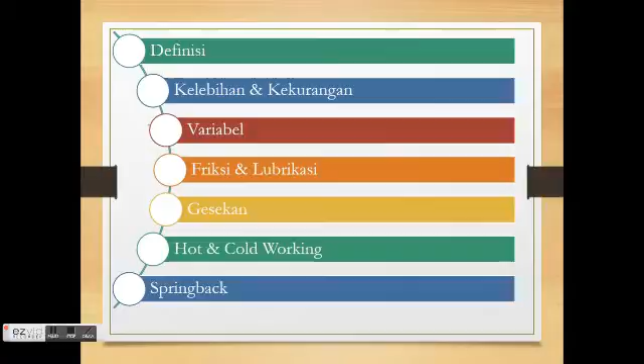Proses pembentukan (forming) adalah proses mengubah bentuk logam dengan suatu gaya pada arah tertentu tanpa menyisakan serpihan.

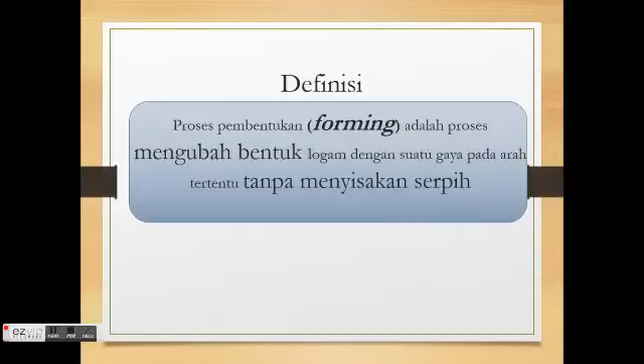Kelebihan dari metal forming, karena padatan, maka tidak perlu perangkat pembawa cairan. Tidak ada kompleksitas pemadatan. Dibanding dengan proses pemesinan, proses pembentukan menghasilkan scrap yang lebih sedikit.

Kekurangan dari metal forming ialah gaya yang diperlukan tinggi, mesin dan perkakas mahal. Sebagai konsekuensi dari kedua hal tersebut, maka harus dalam produksi besar.

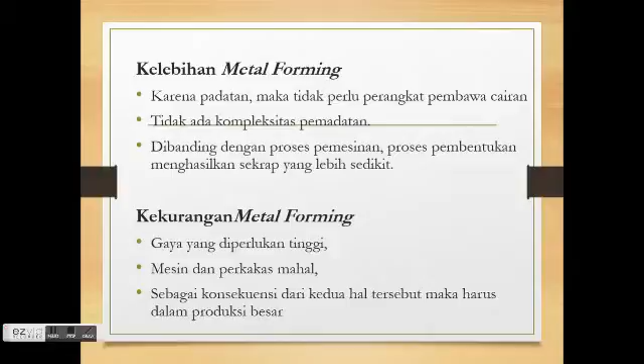Variabel proses pembentukan. Variabel bebas, yaitu variabel yang ditentukan ketika proses setup, di mana variabel tersebut dapat dikontrol langsung. Variabel tak bebas adalah konsekuensi dari pilihan variabel bebas.

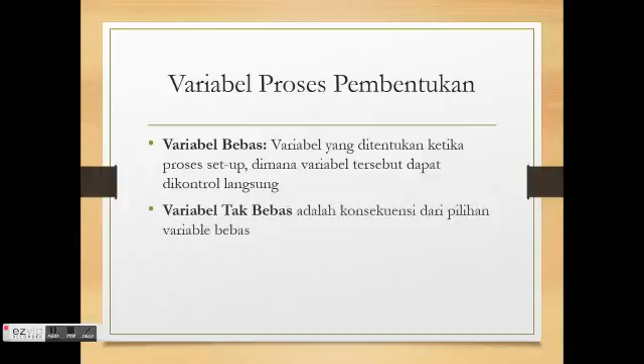Variabel bebas meliputi material permukaan, sifat kimia, dan persyaratan sifat serta karakteristik bahan.

Dasar pemilihan: kemudahan fabrikasi dibatasi oleh sifat produk yang diinginkan. Geometri benda kerja dipilih dari varietas bentuk yang ada atas pertimbangan ekonomi.

Geometri perkakas atau cetakan sangat berpengaruh karena sistem perkakas akan memproduksi dan mengontrol aliran logam.

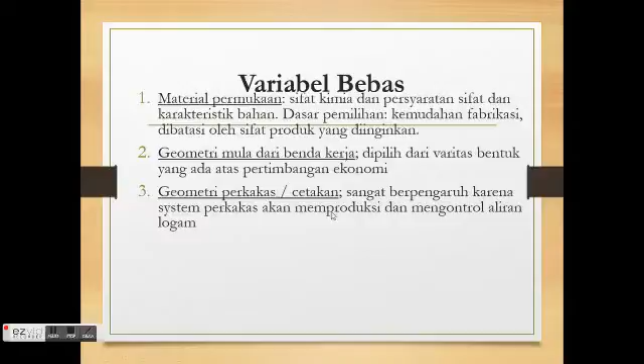Yang keempat, pelumasan. 50% daya yang diberikan digunakan untuk mengatasi gesekan. Fungsi dari pelumas yaitu melumasi, pendingin, pembatas panas, pencegah korosi, dan senyawa pemusnah. Yang perlu diperhatikan ialah tipe pelumas, jumlah yang harus diberikan, dan metode pemberian.

Kelima, suhu permukaan baik untuk benda kerja dan perkakas. Keenam, kecepatan operasi mempengaruhi efektivitas pelumas, gaya yang diperlukan untuk operasi, dan waktu tersedia untuk pindah panas. Dan yang ketujuh ialah jumlah deformasi.

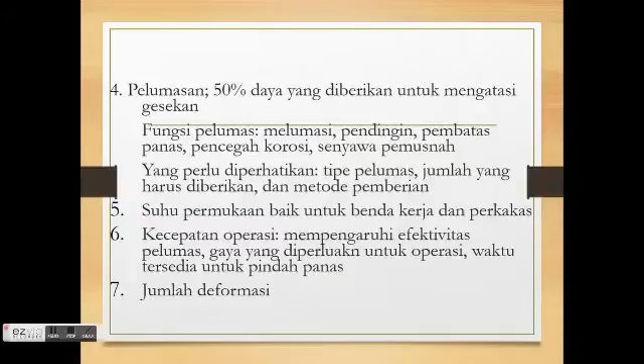Variabel tak bebas. Pertama, gaya atau daya yang diperlukan. Kedua, sifat material produk. Perhatian konsumen pada bentuk dan sifat material akhir sehingga perencana harus pandai memilih material awal dan memprediksi pengaruh proses dalam mengubah sifat tersebut.

Ketiga, exit atau final temperatur. Keempat, surface finish, yaitu permukaan akhir dan kehalusan. Dan yang kelima, sifat aliran bahan.

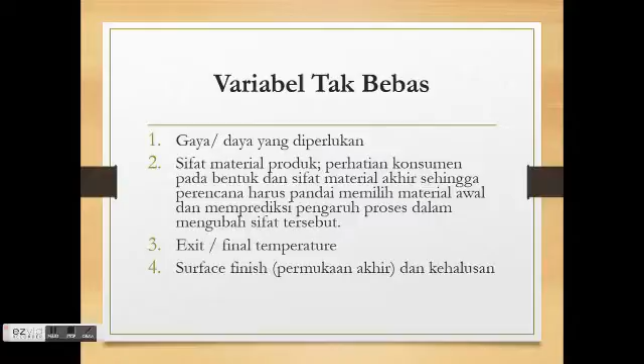Friksi dan lubrikasi. Beberapa proses, 50% energi input digunakan untuk mengatasi gesekan. Surface finish dan kepresisian produk dipengaruhi oleh friksi.

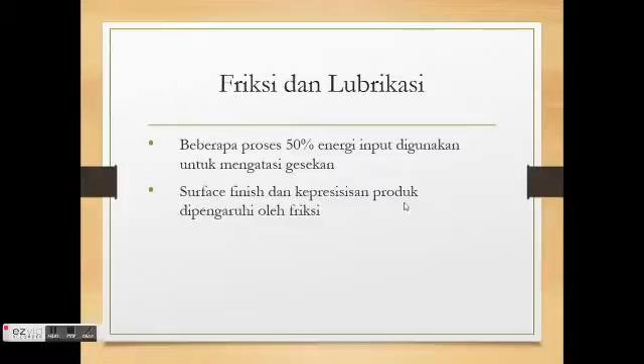Pada gear, bearing, journal, dan komponen sejenis, kondisi friksi melibatkan: pertama, dua permukaan dengan material dan kekuatan serupa; kedua, di bawah beban elastik di mana salah satu komponen mengalami perubahan bentuk permanen; ketiga, keausan berbentuk lingkaran yang menghasilkan kesesuaian permukaan, umumnya pada suhu rendah sampai sedang.

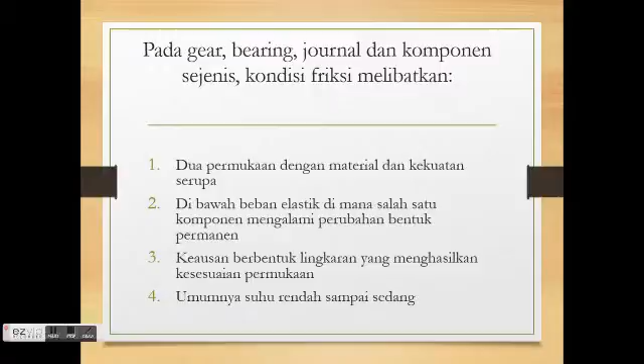Pada proses pembentukan, tool bersifat keras dan tak mampu bentuk. Hanya sekali atau satu tahap deformasi, benda kerja pada suhu yang naik atau tinggi.

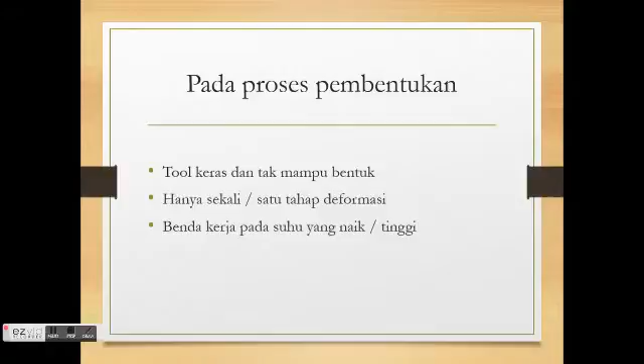Gesekan. Menurut teori friksi modern, permukaan yang rata tidaklah rata, namun ada kekasaran. Bila dua permukaan berinteraksi, kontak permukaan dibangkitkan untuk mengatasi beban yang diberikan.

Pertama, bila beban ringan, hanya 3 titik yang kontak. Bila beban naik, luasan kontak naik. Bila beban tinggi, seluruh permukaan kontak. Bila beban dinaikkan lagi, maka luasan permukaan kontak tak akan naik lagi dan friksi tetap.

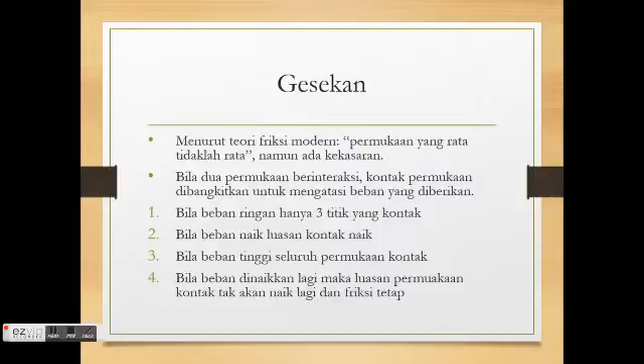Selanjutnya, pengaruh tekanan kontak terhadap gesekan. Semakin tinggi tekanan kontak, maka friksi akan meningkat. Namun, jika tekanan kontak terus dinaikkan, friksi akan tetap.

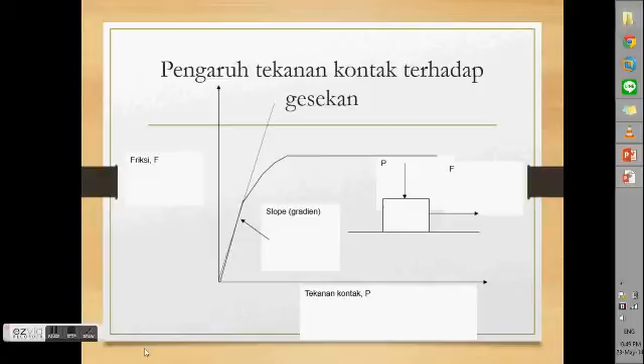Berdasarkan suhu, proses forming diklasifikasikan menjadi hot working, cold working, dan warm working.

Hot working. Deformasi dilakukan di bawah kondisi temperatur dan laju strain regangan tertentu, di mana rekristalisasi terjadi simultan dengan deformasi. Untuk mencapai ini, suhu deformasi biasanya di atas 0,6 kali titik cair material pada skala suhu absolut.

Cold working adalah deformasi di bawah kondisi proses recovery tidak aktif, biasanya suhu kerja kurang dari 0,3 kali suhu leleh benda kerja. Yang ketiga, warm working adalah deformasi di bawah kondisi transisi, yakni suhu kerja antara 0,3 dan 0,6 kali suhu leleh.

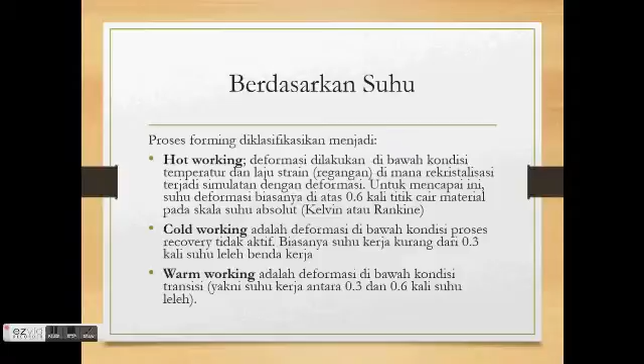Hot working didefinisikan sebagai deformasi plastis logam di atas suhu rekristalisasinya. Yang perlu diingat, beda material beda suhu rekristalisasinya. Kenaikan suhu berpengaruh terhadap penurunan tegangan logam dan meningkatkan keuletannya.

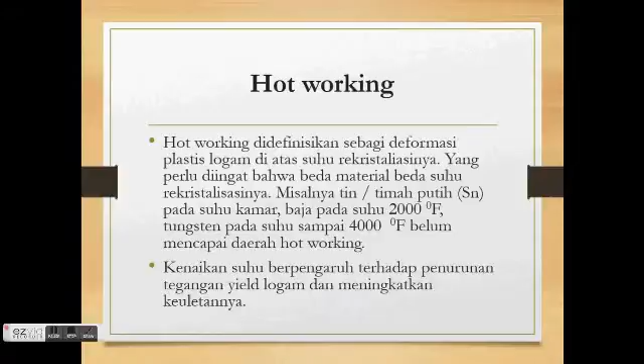Berikut merupakan video dari hot working.

Here, the steel material is processed plastically at very high temperatures. Rotating rolls reduce the thickness of the material and produce long strips that can be used for manufacturing products such as steel plates.

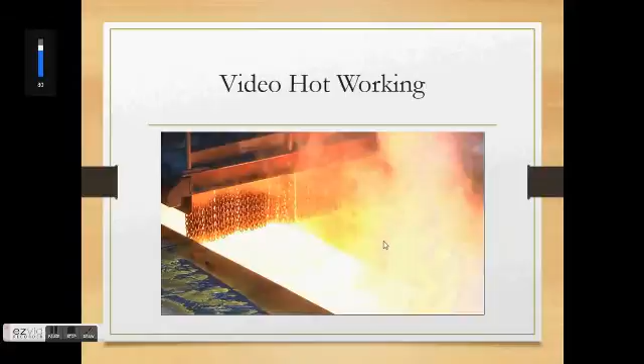We will be going through the various stages of the hot rolling process. Each stage requires knowledge and experience to ensure a high-quality product.

The material is heated in the reheating furnace, rolled in the roughing mill, coil boxed, rolled in a finishing mill, cooled and coiled.

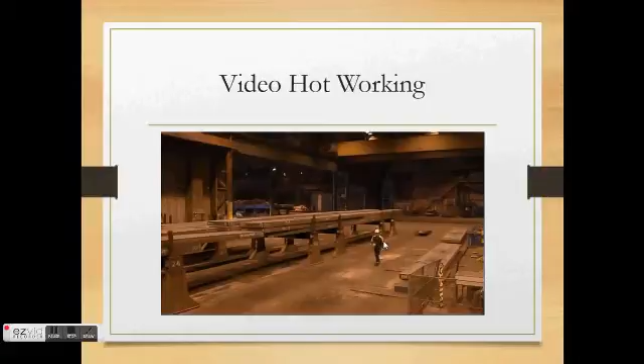Before the slab can be processed, it must be heated. The slab is continuously cast and has the dimensions required for the final product of a correct weight, width, and thickness.

These furnaces heat the material to about 1200 degrees centigrade. Two walking beam furnaces feed the material through the oven.

The heating is especially important as it affects the properties of the material. If the material is not sufficiently heated, incorrect material properties will arise. This is due to carbides and nitrides failing to dissolve.

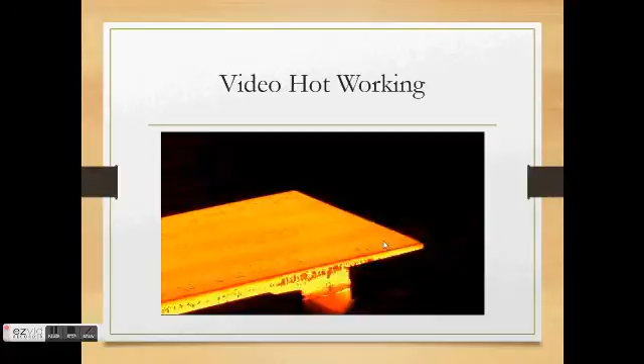During the heating process and the transport to the roughing mill, the hot material reacts to the oxygen in the air, and a mill scale consisting of oxide is formed on the surface. If the oxide layer remains on the material during rolling, the layer risks being rolled into the steel material, adversely affecting the surface quality of the final product.

The material must undergo a mill scale cleansing before rolling. In order to cleanse the surface, water is sprayed at high pressure, 160 bar.

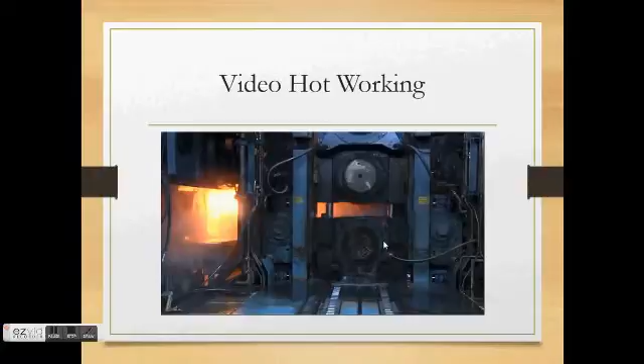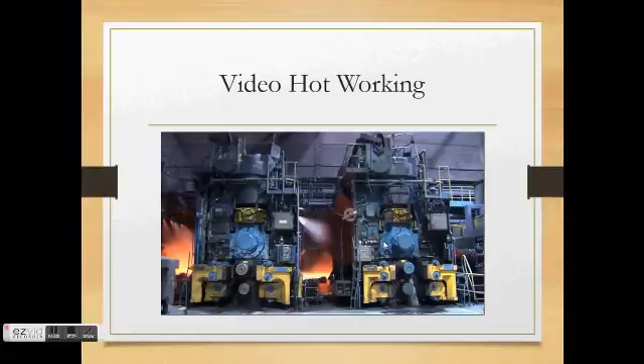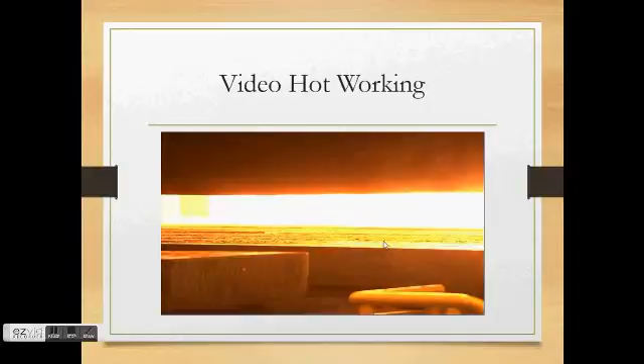We will be going through the various stages of the hot rolling process. Each stage requires knowledge and experience to ensure a high-quality product.

The material is heated in the reheating furnace, rolled in the roughing mill, coil boxed, rolled in a finishing mill, cooled and coiled.

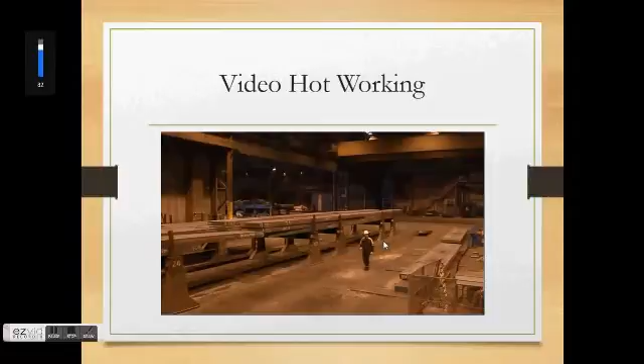Before the slab can be processed, it must be heated. The slab is continuously cast and has the dimensions required for the final product of correct weight, width, and thickness.

These furnaces heat the material to about 1200 degrees centigrade. Two walking beam furnaces feed the material through the oven.

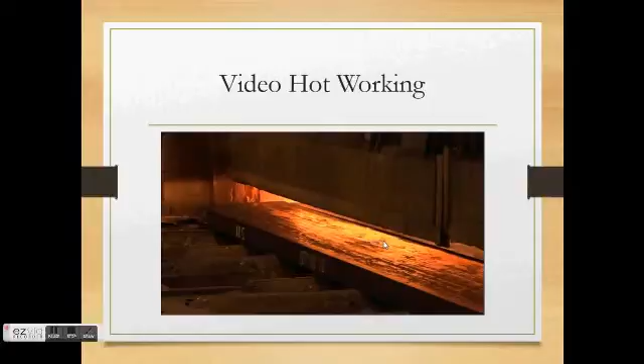The heating is especially important as it affects the properties of the material. If the material is not sufficiently heated, incorrect material properties will arise. This is due to carbides and nitrides failing to dissolve.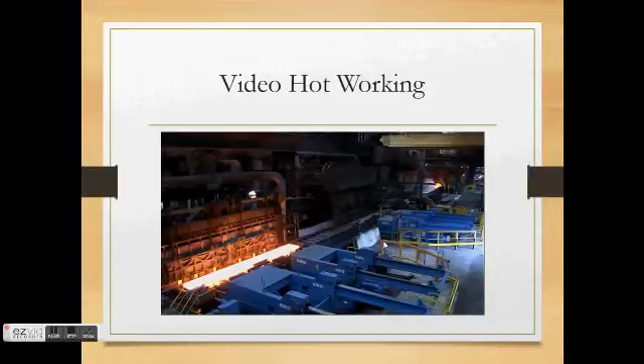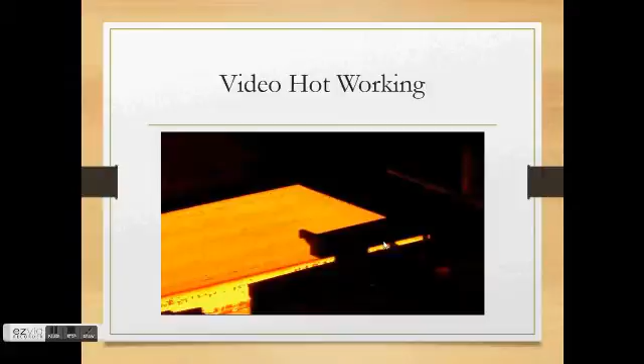During the heating process and the transport to the roughing mill, the hot material reacts to the oxygen in the air, and a mill scale consisting of oxide is formed on the surface. If the oxide layer remains on the material during rolling, the layer risks being rolled into the steel material, adversely affecting the surface quality of the final product.

The material must undergo a mill scale cleansing before rolling. In order to cleanse the surface, water is sprayed at high pressure, 160 bar.

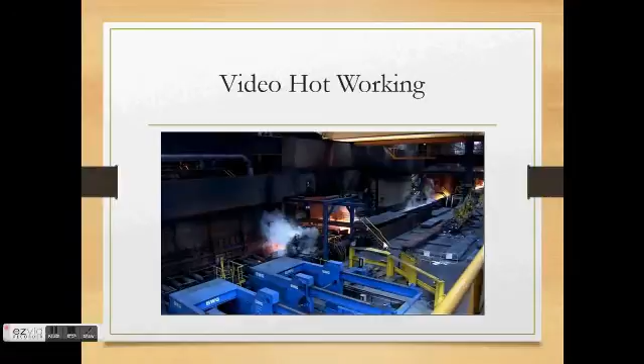After the material has undergone a surface cleansing, it's sent to the roughing mill. Here, the material is rolled from its original thickness of 22 centimeters down to about 3 centimeters. This is a very significant reduction.

At this roughing mill, a powerful 4-high rolling mill is used. That is, 2 backup rolls and 2 smaller working rolls. The backup rolls are often cast steel rolls. The working rolls must have very smooth surfaces and tolerate high temperatures and wear, as they are in direct contact with the material.

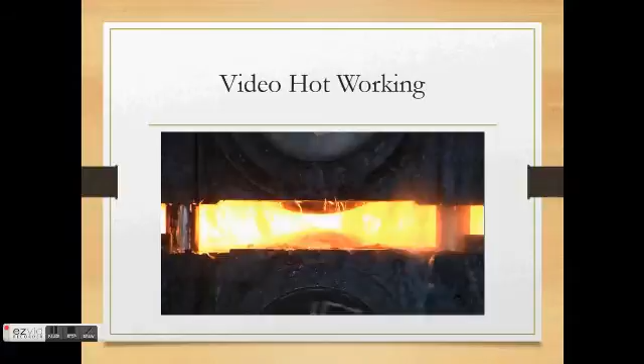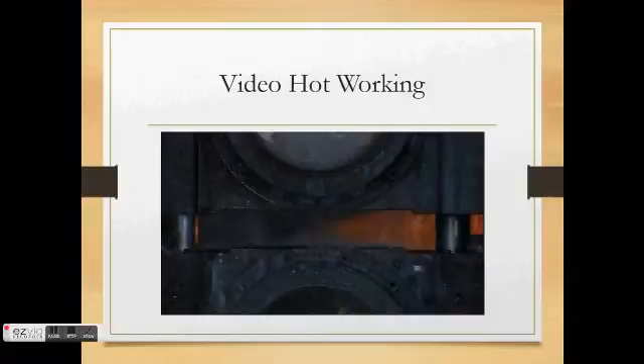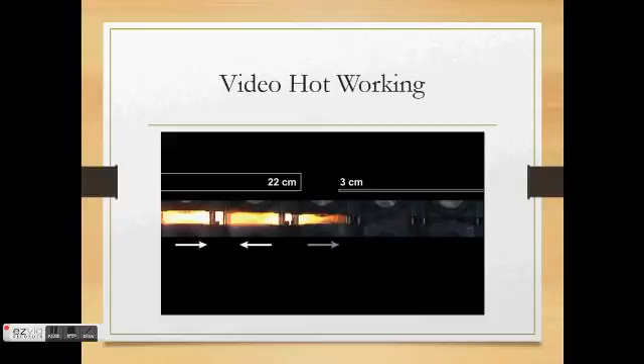This particular material is rolled with 5 passes, where 1 pass means that the material passes through the rolls once. The material is surface cleansed several times during the roughing mill process to remove any new traces of mill scale.

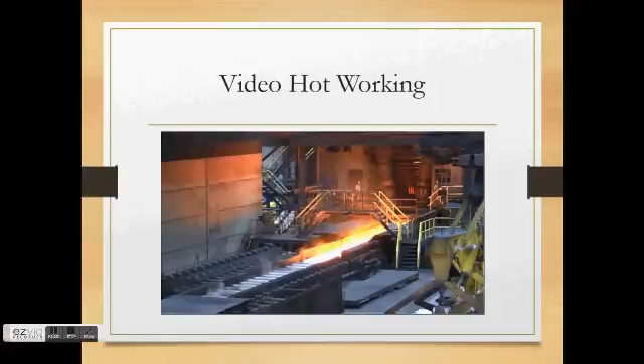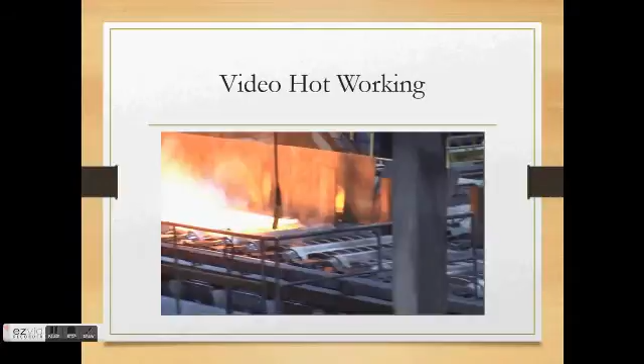In order to control the width of the material, vertical rolls are used. The material is now called transfer bars.

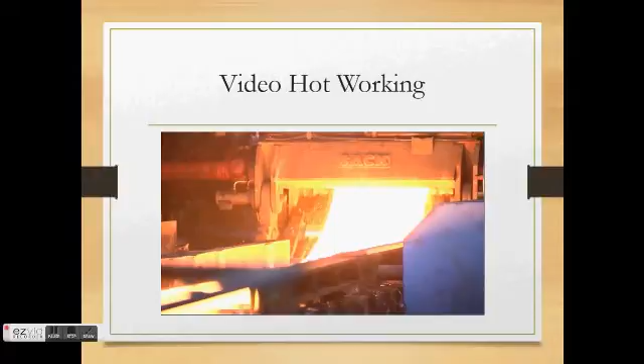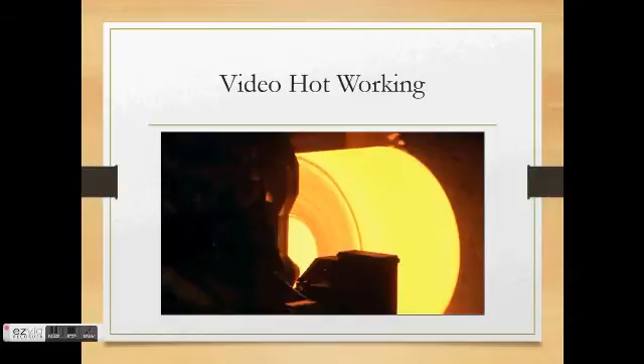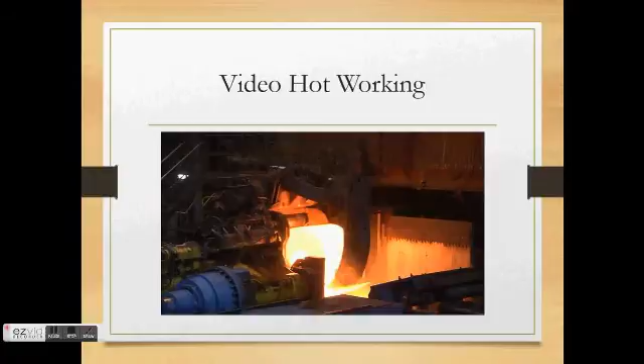After the roughing mill, the transfer bar is rolled up in a coil box. The coil box's primary purpose is to save space, but when inside the coil box, a temperature equalization also occurs. The temperature difference between the ends of the material is minimized as the transfer bar is coiled together. When the transfer bar is removed from the coil box, it has a temperature of about 1050 degrees centigrade.

The ends of the transfer bar are cut off, and the bar undergoes further mill scale removal. After this, it's time for the next stage, the finishing mill. This mill consists of 6 stands in the shape of 4-high rolling mills.

Here, the transfer bars, now called strips, are rolled into a thickness of between 16 and 1.8 millimeters.

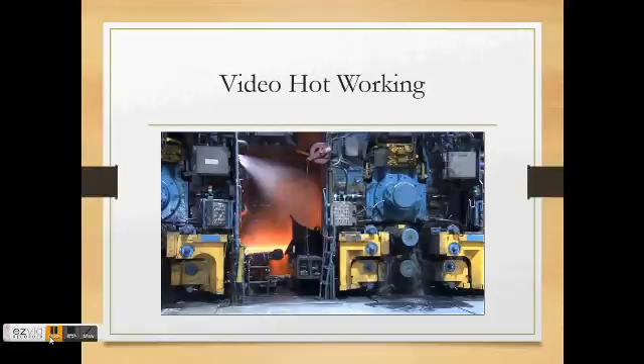Between the rolls, we see an uplooper, which measures and controls, amongst other things, the line speed and the strip tension. The swinging motion that can be observed is when the uplooper is adjusting itself.

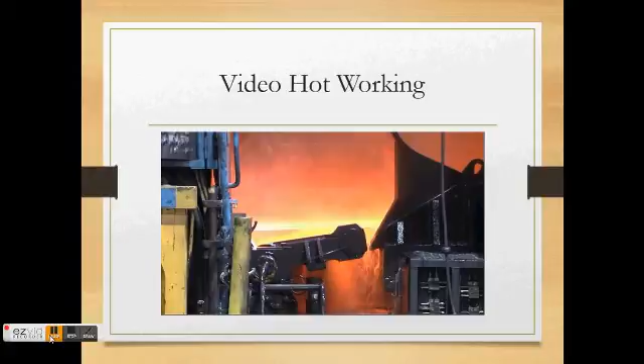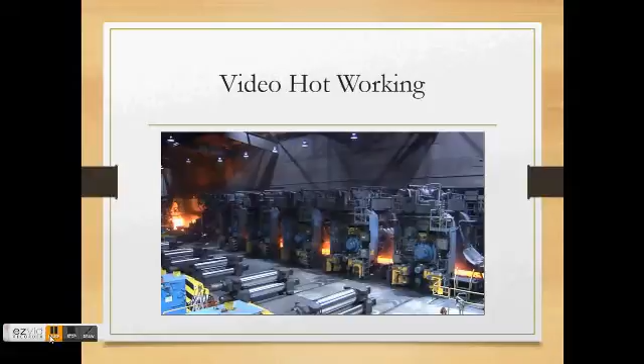In order to control the profile and the flatness of the strips, the working rolls are horizontally adjustable. The first stands control the profile, and in the later stands, the flatness is controlled. It's very important to have a correct strip profile and flatness before any post-processing starts.

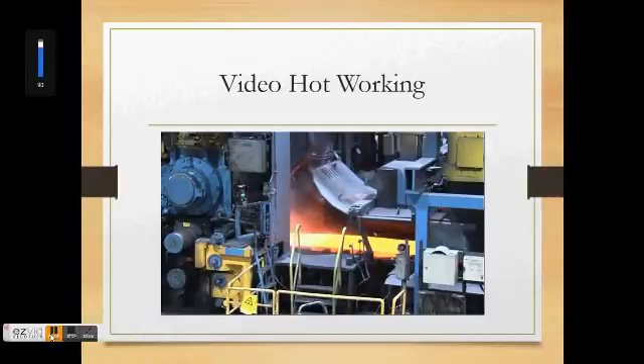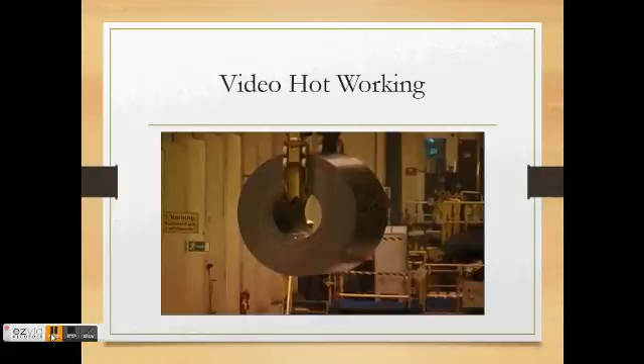The cooling rate is adapted to each strip to produce the appropriate microstructure and material properties of the end product. When the strip is passed through the cooling section, it's coiled in. The temperature during coiling varies between 150 and 750 degrees centigrade, depending on the properties assigned to the material.

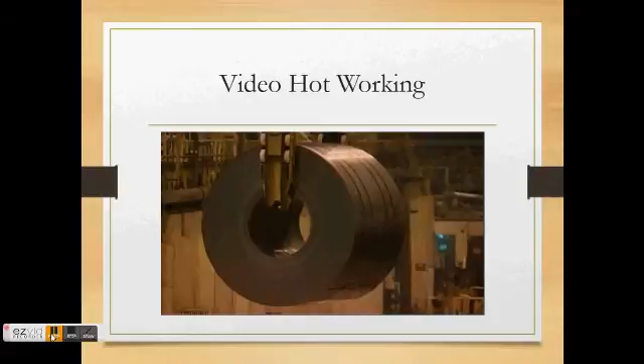After coiling and the subsequent cooling, the strip can be sold directly to the customer or undergo additional processing stages, for instance, cold rolling.

Keuntungan dari hot working: pada suhu hot working, rekristalisasi mengeliminasi efek dari strain hardening atau pengerasan regang, sehingga tidak ada kenaikan signifikan dalam kekuatan yield atau kekerasan atau penurunan keuletan. Kedua, mengurangi atau menghilangkan ketidakhomogenan kimiawi, pori-pori dapat dilas atau direduksi ukurannya selama deformasi. Struktur metalurgis dapat diubah untuk meningkatkan sifat akhir. Pada baja, pada suhu rekristalisasi deformasi terjadi pada struktur kristal austenit FCC yang lemah dan ulet daripada ferit BCC yang kuat dan stabil pada suhu rendah.

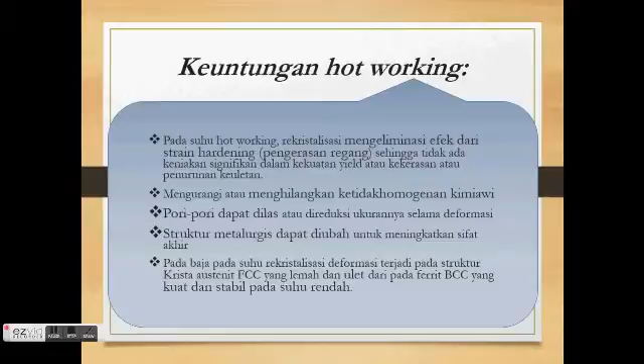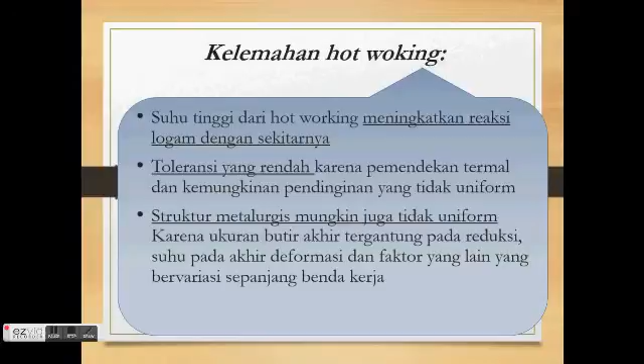Kelemahan dari hot working: suhu tinggi dari hot working meningkatkan reaksi logam dengan sekitarnya. Toleransi yang rendah karena pemendekan thermal dan kemungkinan pendinginan yang tidak uniform. Struktur metalurgis mungkin juga tidak uniform karena ukuran butir akhir tergantung pada reduksi, suhu pada akhir deformasi, dan faktor lain yang bervariasi sepanjang benda kerja.

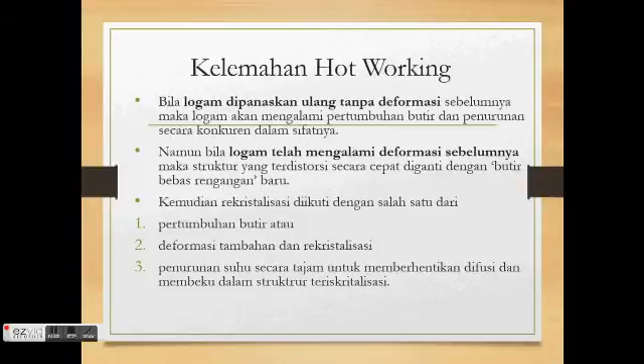Kelemahan lain dari hot working ialah bila logam dipanaskan ulang tanpa deformasi sebelumnya, maka logam akan mengalami pertumbuhan butir dan penurunan secara konkuren dalam sifatnya. Namun, bila logam telah mengalami deformasi sebelumnya, maka struktur yang terdistorsi secara cepat diganti dengan butir bebas regangan baru. Kemudian, rekristalisasi diikuti dengan salah satu dari: pertumbuhan butir, deformasi tambahan dan rekristalisasi, atau penurunan suhu secara tajam untuk memberhentikan difusi dan membeku dalam struktur rekristalisasi.

Selanjutnya, cold working. Cold working adalah deformasi plastis logam di bawah suhu rekristalisasi. Proses biasanya pada suhu kamar, tetapi penaikan suhu ringan biasa digunakan untuk meningkatkan keuletan dan mengurangi kekuatan.

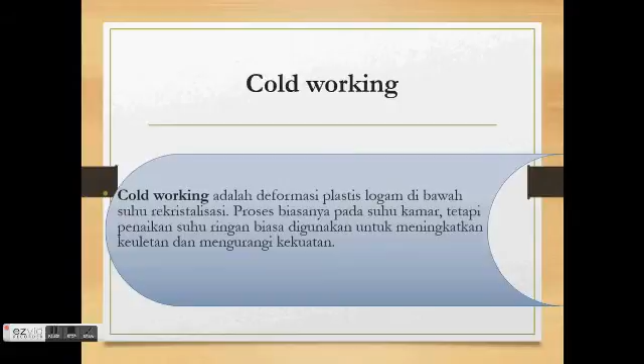Berikut adalah contoh dari cold working.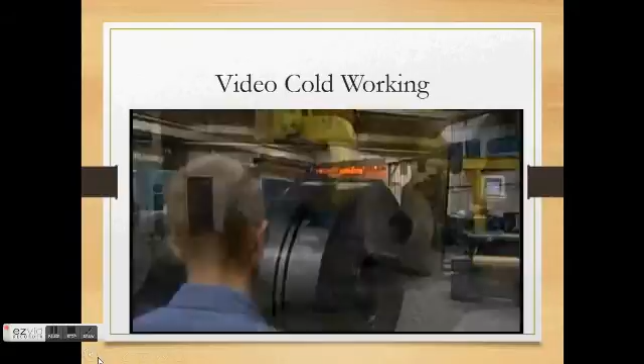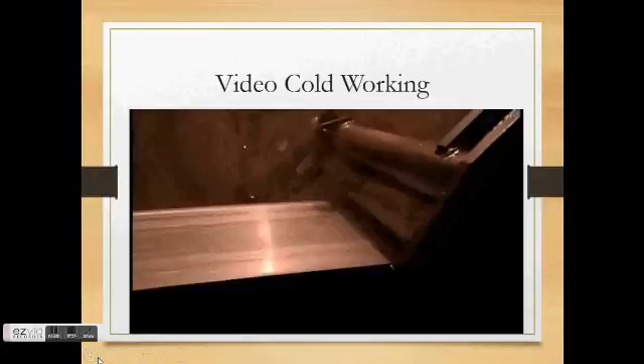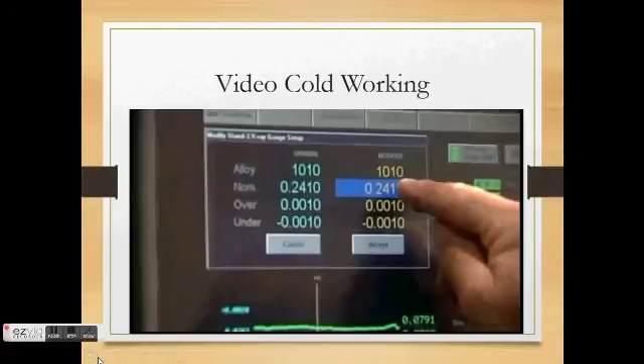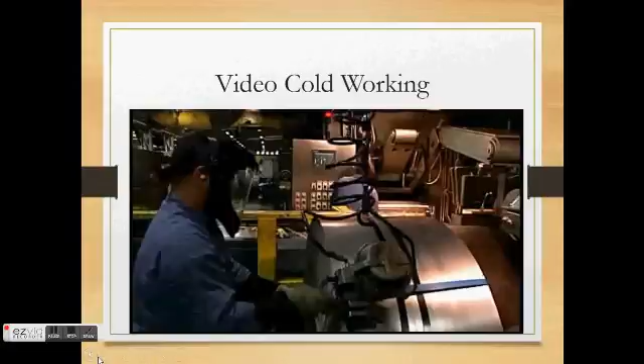Cold rolling steel changes the structure and shape of steel through rolling and applying pressure at a low temperature. At Worthington Steel, we have a 3-stand tandem mill, 3 reversing mills, and various temper mills, which primarily reduce gauge and add value by means of edging and controlling flatness. This is part of our overall cold roll process. Cold rolling changes the mechanical properties of steel, producing certain useful characteristic combinations, including ductility, hardness, stiffness, and strength. Worthington's leadership in the cold rolled strip market has allowed us to become the largest producer of cold rolled strip steel in the United States.

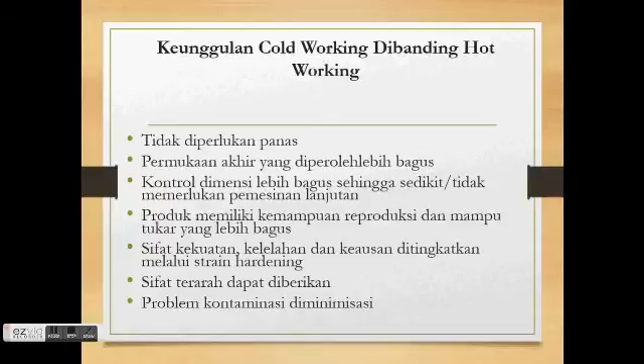Keunggulan dari cold working dibanding hot working adalah, pertama, tidak diperlukan panas. Permukaan akhir yang diperoleh lebih bagus, kontrol dimensi lebih bagus sehingga sedikit atau tidak memerlukan pemesinan lanjutan. Produk memiliki kemampuan reproduksi dan mampu tukar yang lebih bagus. Sifat kekuatan, kelelahan, dan keausan ditingkatkan melalui strain hardening. Sifat terarah dapat diberikan, problem kontaminasi diminimasi.

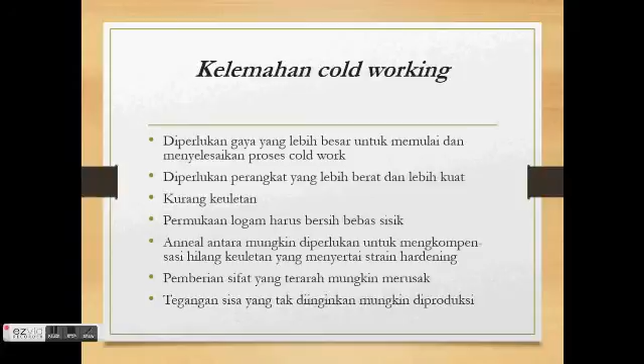Kelemahan dari cold working ialah diperlukan gaya yang lebih besar untuk memulai dan menyelesaikan proses cold work. Diperlukan perangkat yang lebih berat dan lebih kuat, kurang keuletan, permukaan logam harus bersih bebas sisik, anil antara mungkin diperlukan untuk mengkompensasi hilang keuletan yang menyertai strain hardening. Pemberian sifat yang terarah mungkin merusak, tegangan sisa yang tak diinginkan mungkin diproduksi.

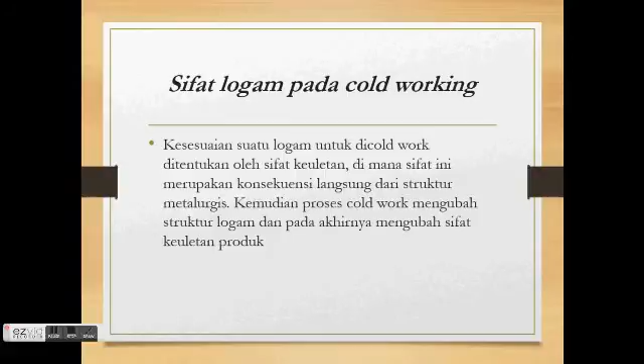Sifat logam pada cold working. Kesesuaian suatu logam untuk di-cold work ditentukan oleh sifat keuletan, di mana sifat ini merupakan konsekuensi langsung dari struktur metalurgis. Kemudian, proses cold work mengubah struktur logam dan pada akhirnya mengubah sifat keuletan produk.

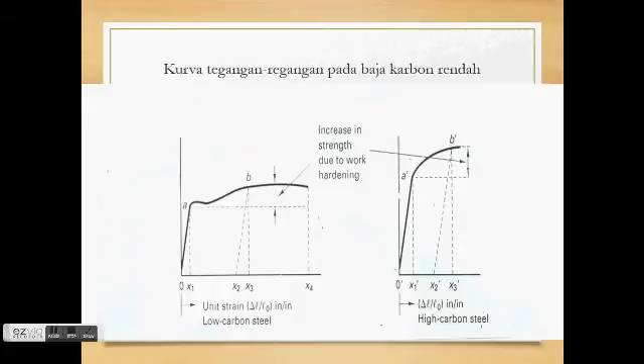Berikut ialah kurva tegangan regangan pada baja karbon rendah.

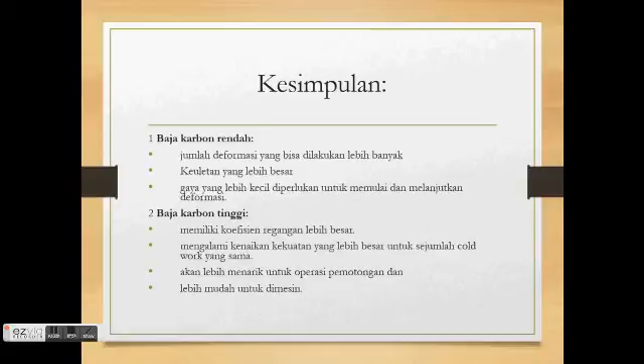Kesimpulannya ialah, pada baja karbon rendah, jumlah deformasi yang bisa dilakukan lebih banyak, keuletan lebih besar, gaya yang lebih kecil diperlukan untuk memulai dan melanjutkan deformasi. Baja karbon tinggi memiliki koefisien regangan lebih besar, mengalami kenaikan kekuatan yang lebih besar untuk sejumlah cold work yang sama, akan lebih menarik untuk operasi pemotongan, dan lebih mudah untuk dimesin.

Spring back. Bila logam dideformasi dengan pemberian sejumlah beban, sebagian dari deformasi adalah elastis. Misalnya, bila logam ditarik sampai titik X1 pada gambar di atas dan beban dilepaskan, maka logam akan kembali ke bentuk semula karena deformasi logam tersebut adalah elastis.

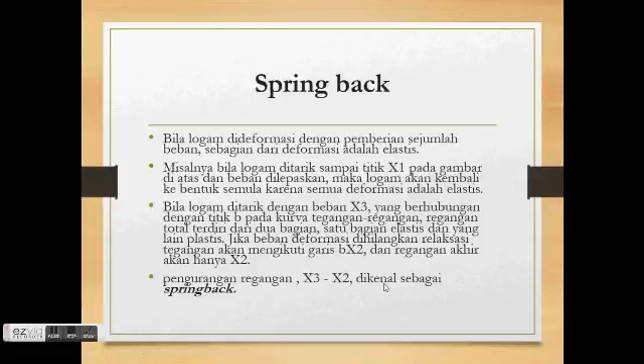Bila logam ditarik dengan beban X3 yang berhubungan dengan titik B pada kurva tegangan regangan, regangan total terdiri dari dua bagian, satu bagian elastis dan yang lain plastis. Jika beban deformasi dihilangkan, relaksasi tegangan akan mengikuti garis B-X2, dan regangan akhir akan hanya X2. Pengurangan regangan X3-X2 dikenal sebagai spring back.

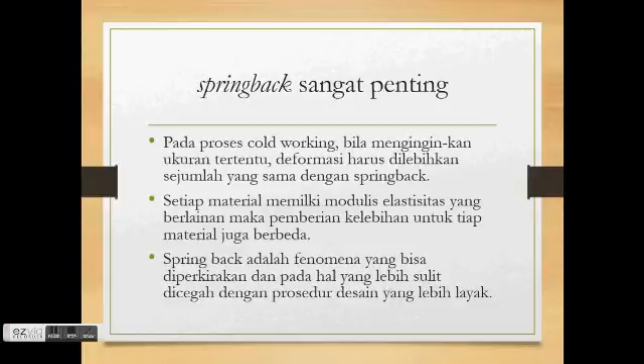Spring back sangat penting. Pada proses cold work, bila menginginkan ukuran tertentu, deformasi harus dilebihkan sejumlah yang sama dengan spring back. Setiap material memiliki modulus elastisitas yang berlainan, maka pemberian kelebihan untuk tiap material pun berbeda. Spring back adalah fenomena yang bisa diperkirakan, dan pada hal yang lebih sulit dicegah dengan prosedur desain yang lebih layak.